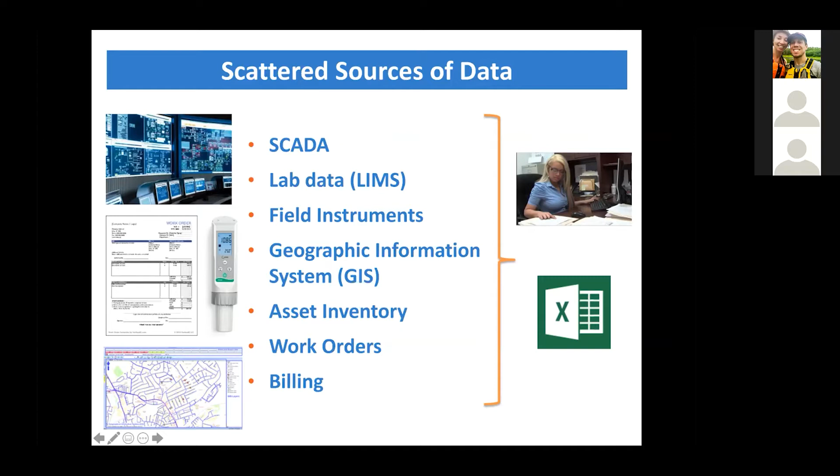So as I mentioned, heavy on the paper use, and also using Excel, which is great, but there are version control issues. That causes a problem with making sure you're up to date with which Excel version you're looking at. There's increasing regulatory pressure, as I mentioned.

You know, it takes a lot of time to gather all that information that's been collected on paper or on Excel out in the field, and that supervisor has to spend a lot of time to organize and review all that before he or she puts it into any type of DMR or a monthly operating report that goes to the state.

And of course, with that comes a lot of human error. It's not intentional, but someone's writing something down, it's hard to read it. There's going to be an error somewhere along the way. And then there's more pressure as well with developing asset and maintenance plans. I've seen some states are starting to put together guidelines to get them to start pushing to put together these asset management plans. And in some cases, they've taken it further where they actually have specific reports they require.

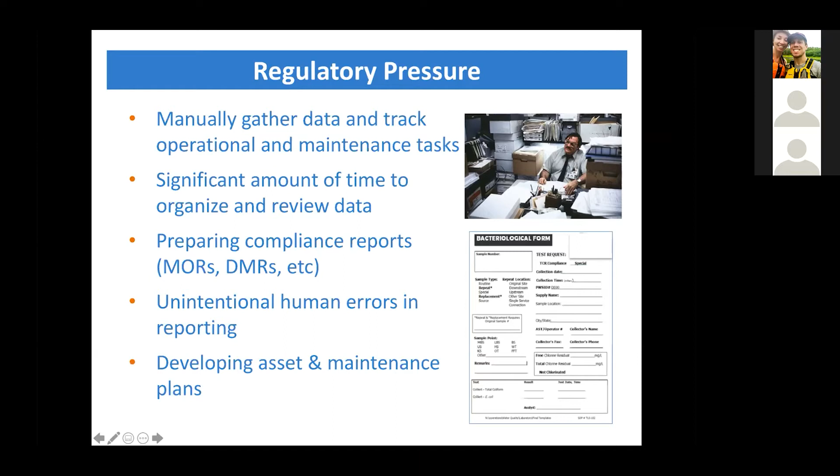So a little background on the FLOWatch platform. After we collected all this kind of information of what's going on with operational processes, we decided to build a platform that was very focused on the plant operator. Essentially, our strategy was to build a system that was very configurable or quickly configurable for any type of plant from the ground up.

Our whole team feels as though the key to software adoption, especially in our industry, is to make sure it's very user-friendly. Because if a plant operator or user of the system doesn't like it or doesn't want to use it or isn't putting in the proper data, the output reports for management are pretty much useless. So we wanted to build a system that was, like I said, easy to use, but also scalable. We want it to be so that you could easily configure it to the uniqueness of a plant.

Within FLOWatch, we built it so that it was easy to add in any new regulatory parameters that you want to track. There are some plants out there that need upgrades, and as they do the upgrades, they change what they're tracking at certain locations. So we wanted our system to be very moldable to the plant at any point in time.

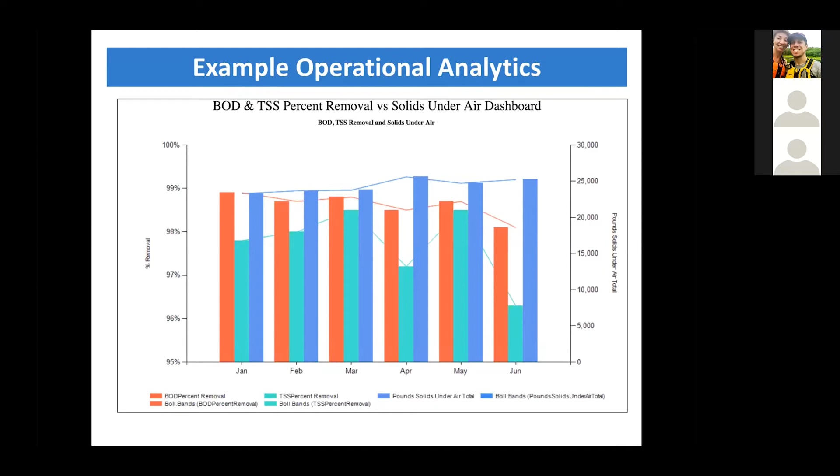So just to recap on everything I've been talking about, in terms of technical benefits, we created a system that is going to allow the users to have access to information right away. Everything is near real time because it's based on data coming in. If you're getting SCADA data streaming in, you may have 15-minute intervals or whatever the client's interested in. As they log in, they can see all the information coming in from SCADA, from the log sheets, and their mobile apps. And from there, they can just run their reports with a click of a button.

Also, the way we designed FLOWatch, it's supposed to be easily configurable. So you're looking at a much shorter go-live timeline. We have a specific process in place for the implementation phases when we bring on a new client, and we can do things in just a matter of a few months, depending on the size of the project, what they want, what the requirements are. Essentially, you set up the plant, you set up the parameters they're tracking, you work on the SCADA integration piece, you do some training. It's a very fluid back and forth between us and the client.

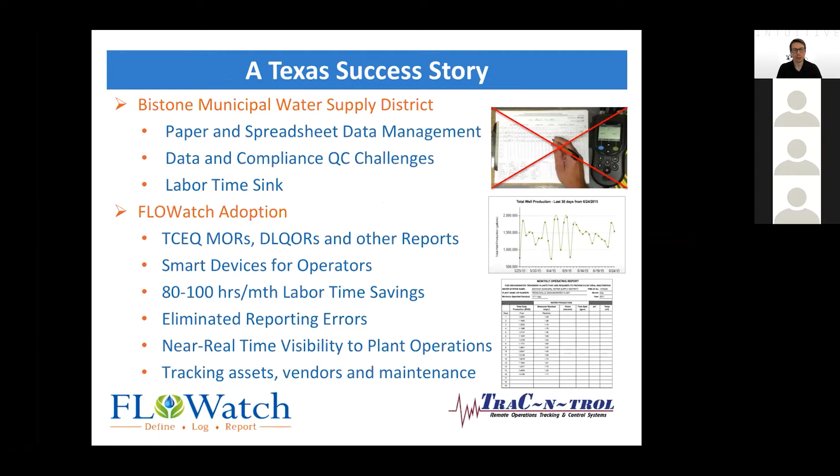Yes. We actually created the platform to also export for simulation and modeling and whatnot. So it can go both directions. Right. So you do have an API where somebody can read data. Yes, that is correct. Cool. Perfect. I think that answers exactly what they were hoping.

I've got another question here. It says, as I understand it, you can pull data from various sources that include public domains. So that would be, I think, like weather data from USGS or Environment Canada, or different bits of data from public sources. Yes, we can, as long as they have an API or some sort of access. Sure, understood. Yeah, in fact, in a lot of cases we did that with other data.

I was going to say, I think the USGS and a bunch of the data that you get from the US government is available for anyone, and I think they actually provide it in JSON and XML, I believe. But in a lot of other sources, you need an API key or something as well. So if the customer had that, you're saying they should be able to query those?

Yeah, in fact, we did that with some agency on the energy side. It was an energy project that we were working on, and we pulled it from a website, and they had all the instructions of how we would have to pull the information, and that worked. And they gave us near real-time information. It was all energy driven, and then we also have done it for weather.

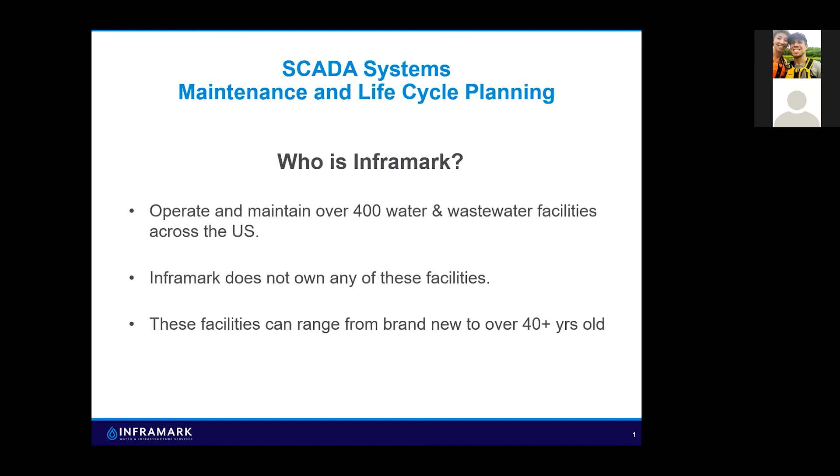So anyway, the goals for this breakout session is to develop a list, and this is where I want your audience participation, okay, which is a list of PM tasks for control systems. Oftentimes we go to plants, we see control systems, SCADA systems, and since it was installed, nobody's touched it. Nobody's even looked at it. The only time somebody does something to it is when it fails. Lightning strike hits it, something like that.

So what I want to do is develop a list of PM tasks that we can send out to all the attendees today. And you can use them in your facilities, or if you're an engineer, integrator, you can use them as part of your O&M manuals, or however you want to use them. And then the next part of it is to talk about hardware life cycles and how to plan and proactively address obsolescence, okay?

SCADA systems have been around for quite a few years. The first one I've worked on was back in 1982. And it was run on a DEC PDP-11/44 mini mainframe computer at a wastewater plant. They've changed a lot since then. We went into legacy systems like Bristol Babcock, Healy Ruff, etc. Turbotrol, that was that system I first started with. And then they've kind of moved more towards the desktops. So a lot of different systems out there now, and we still need to plan for obsolescence, end of life cycle.

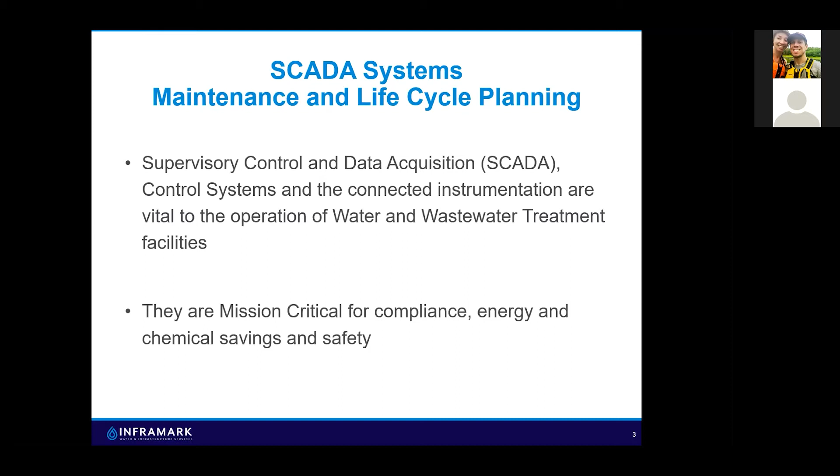But a month after the system was up and running well, if you turned it off, they were screaming at you. So we've gone from, okay, this is a new kid on the block, to something that we can't live without in a lot of plants. It's mission critical, keeps us in compliance, saves us energy, chemical savings, and it also has safety aspects to it too. So that being the SCADA systems today, then why do we seem to neglect them?

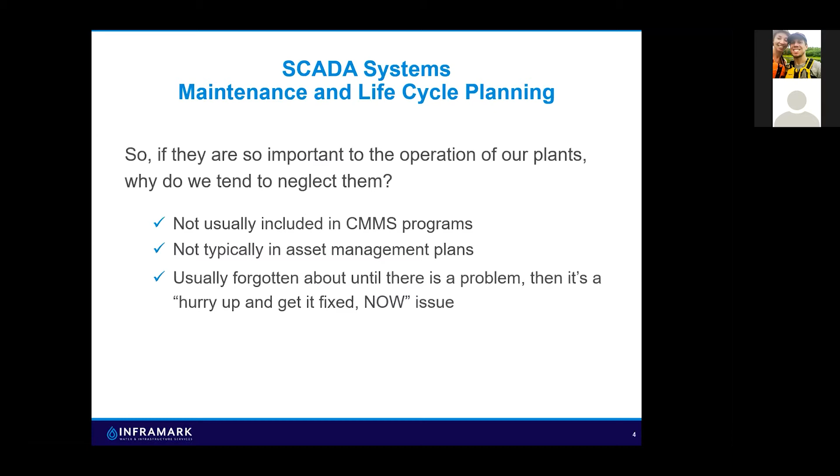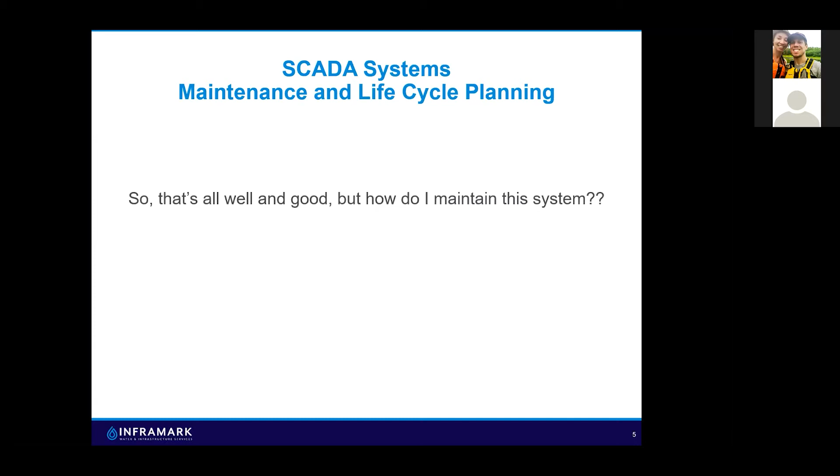They're not usually in a CMMS program. They're not typically in asset management plans. And like I said earlier, until it's broken, and then it's a hurry up, get it fixed now issue, they're not really addressed. So the next question is, okay, how do we maintain those systems? Or what do we tell our clients to do to maintain their systems?

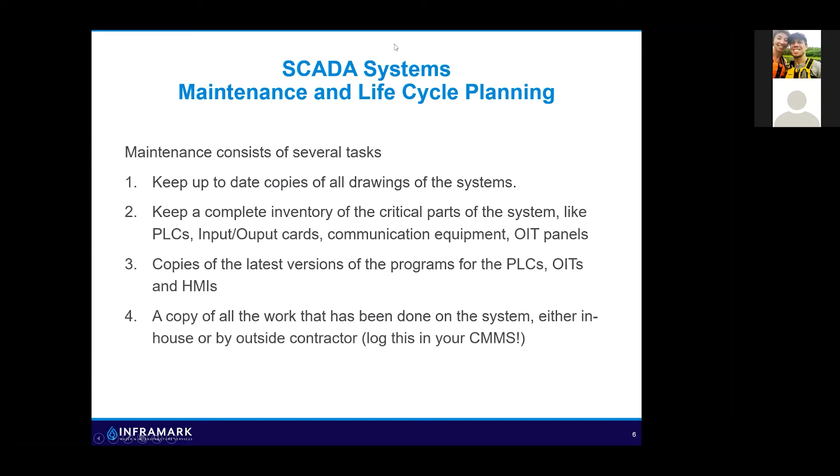So we've got several tasks here, and I'm actually going to switch the screen and go to a spreadsheet, which I've started. Okay, I've seeded it a little bit, and this is where I want some audience participation, because I want to see what you guys think. What should we put in here for PMs? So if you can fire away in the Q&A box, that would be great. I'd love to see some stuff coming in from you guys. I've got some other things I can seed this with, but please send it. Okay.

All right, just got the first one come in there. So it's critical alarm testing. Okay, great. And thank you for your correction, Mohammed. I just almost read it as you initially wrote it, which would have been more embarrassing for me. So, Mohammed puts in eyewash. Right. Okay. Actually, critical alarm testing for anything. I'm going to leave it open for components, because I think it needs to be all.

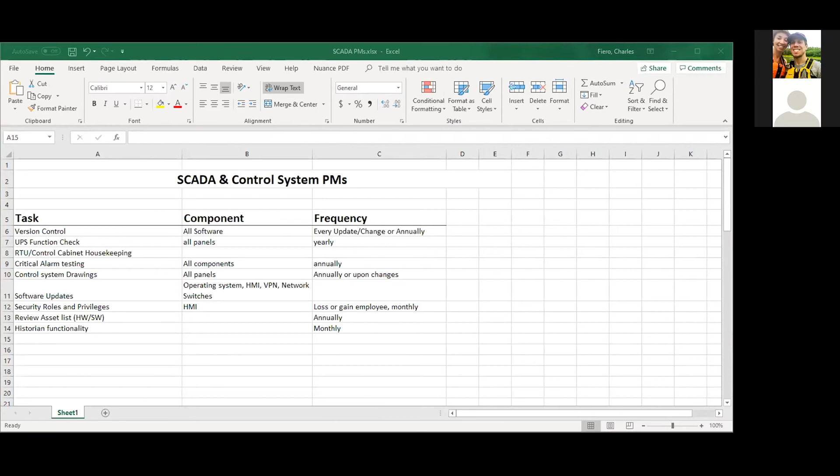Okay. Come on, we got to have some more here. Historian functionality. And it's suggested monthly. Okay. Trying to figure out how I can move things around with the screen. Yeah, take your time there. Yeah. So I've got a few other suggestions. System health check. How about call that diagnostics? And PLC.

Okay. How often do you think we should do a diagnostic check? Do that quarterly, semi-annually, annually? Okay. All right. Yeah, you go for it there, Charles. I'm just looking at the bottom of the list here. So it looks like quarterly just came in. Right. I think that's probably a little bit better. Again, dependent upon the size of the system, that's a good question. Let's see, quarterly.

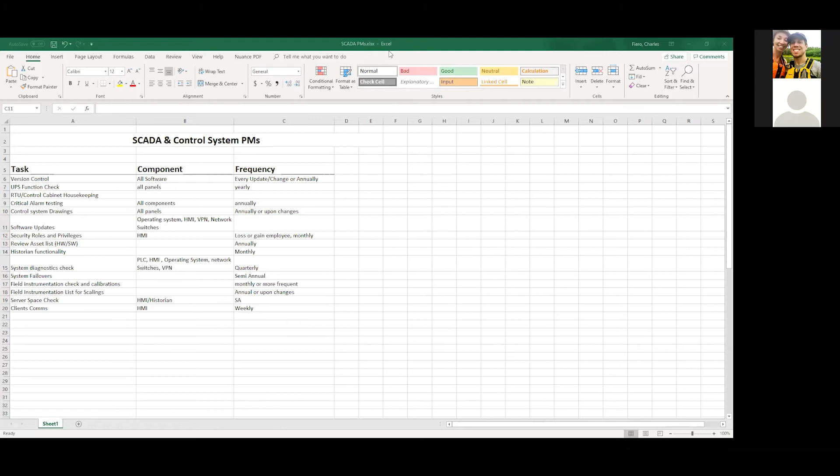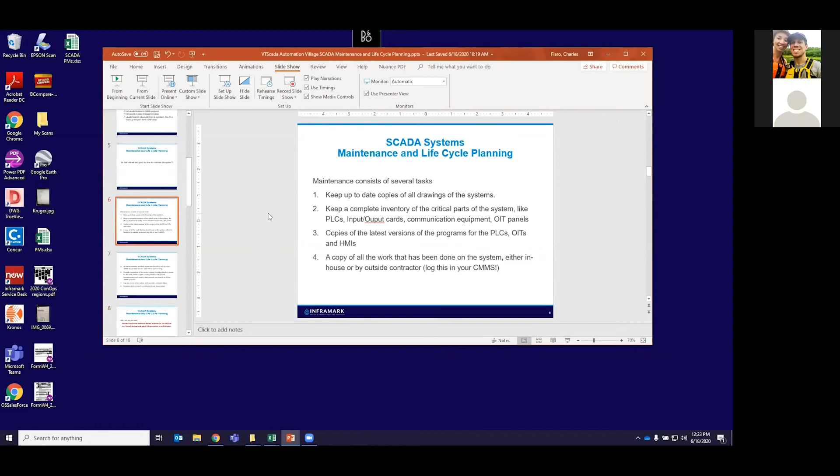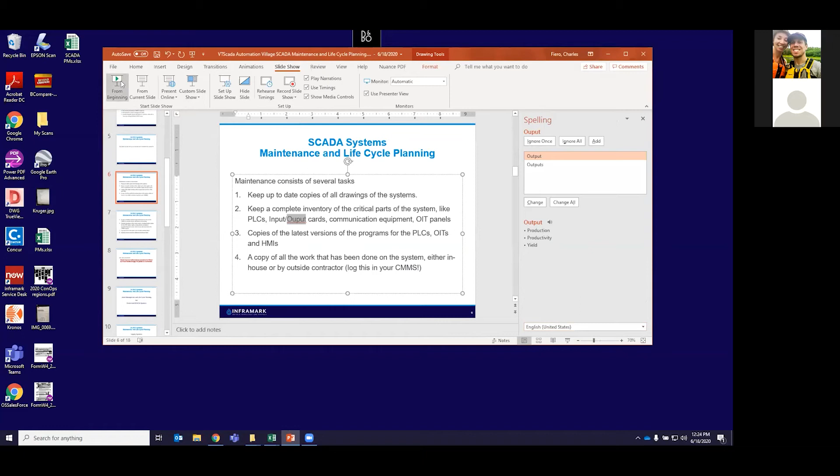Tell you what, okay. Let me throw out some of the ones I've got in here for this that you can, that's not, yeah, there we go. Okay, so I think we've caught a little bit. Obviously, to do a PM program, you're going to need a complete inventory. You want copies of your latest programs, and latest versions of the programs. We talked about version control.

Log into the CMMS all the work that's been done on the system in-house or by an outside contractor. If somebody comes in and replaces an IO card, let's keep track of that. If you keep replacing the same IO card, there may be a deeper problem than just the IO card.

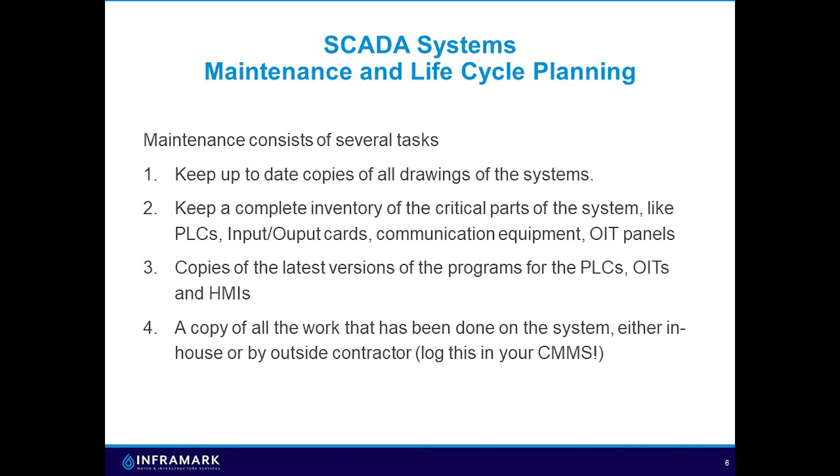Obviously, instrumentation, field equipment. I've got one that I called housekeeping, which includes function checks for the UPS systems, your heaters, your lights, any cooling devices. How many times have you gone into an old control cabinet and you open it up and there's a wasp nest in there? Yes, let's keep the housekeeping down on those. Log the errors that come up in the system and any corrective actions that have been taken.

Nuisance alarms, a pet peeve of mine, mainly because to me a nuisance alarm is one that probably doesn't need to happen anymore. It's alarming a piece of equipment that may not even be there anymore, or there's a failure in the system but nobody's addressed it. So OSHA is actually supposedly coming up with regulations on that particular aspect because it's a safety issue. If you got a lot of nuisance alarms in your systems, your operators become numb to the alarm and tend to ignore it.

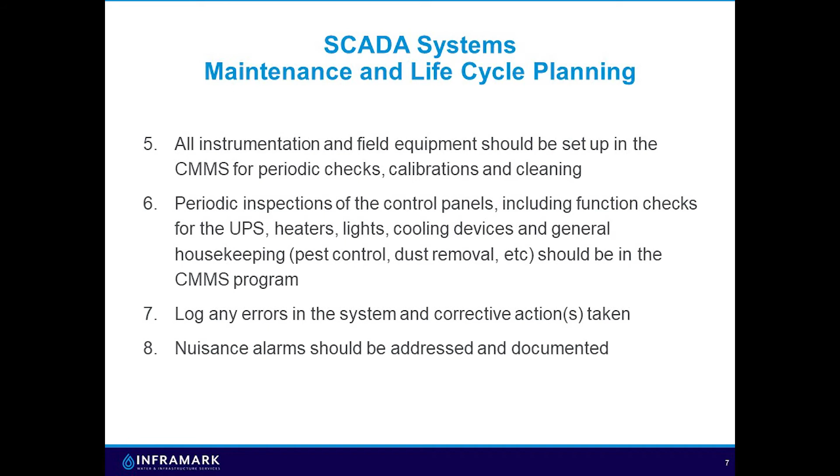Here's one I know that Dave would be glad to talk to. Maintain the annual software license renewals for the HMI firewall devices. Okay. I've gone into a lot of different plants and, okay, they've got an HMI that was put in 10 years ago, hasn't been updated since it was put in. It's running on Windows XP. How secure is that? Not to mention, you look at other things, and your VPN, the switch is outdated, obsolete, and you can't get updates for it. Again, a big security issue. So,

Okay, I think we got all the others in there. I will fill in what I've got in the spreadsheet here, or in the PowerPoint with the spreadsheet, and I'll be glad to send it out to everybody that was in the session today. And feel free to use it. It's not proprietary. It's not copyrighted. It's yours to use and abuse. So, okay.

So let's jump over to asset management, lifecycle planning for control and SCADA systems. And some of you may know much of this already, but I talked earlier about some of the legacy systems. Up until 2010, I was actually working with a plant that had a large portion of Bailey still running in the plant. The plant was upgraded and all that was replaced, but where are you going to get parts for any of these systems at this point in time? It's going to be hard to find that.

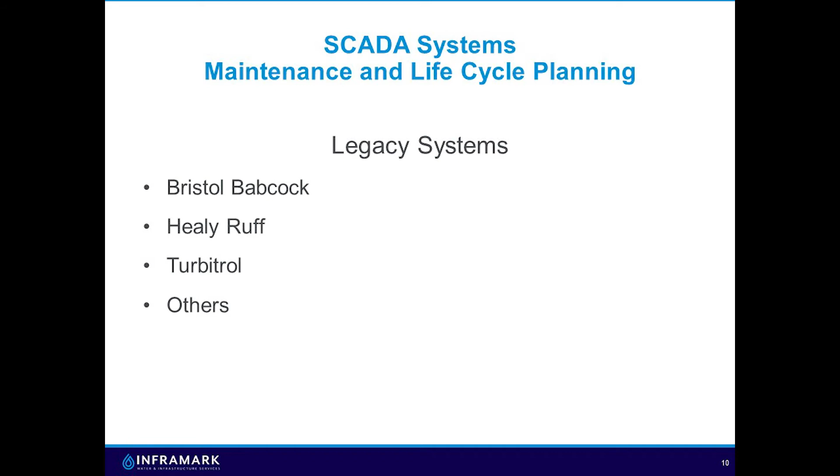PLC's life cycle is around 10 to 15 years. And we define these as 4 parts of the life cycle of the PLC. You've got the development phase. The manufacturer is developing a new PLC. He's got a new CPU, new components, etc. He's doing development. During that time, he's not selling these units, okay?

He's just developing them. Then once it's finalized, ready for sale, it goes into the active sales phase. And that's when, if you're an integrator, all the sales reps are coming to your office saying, I need to show you this new PLC we just developed, etc. Okay.

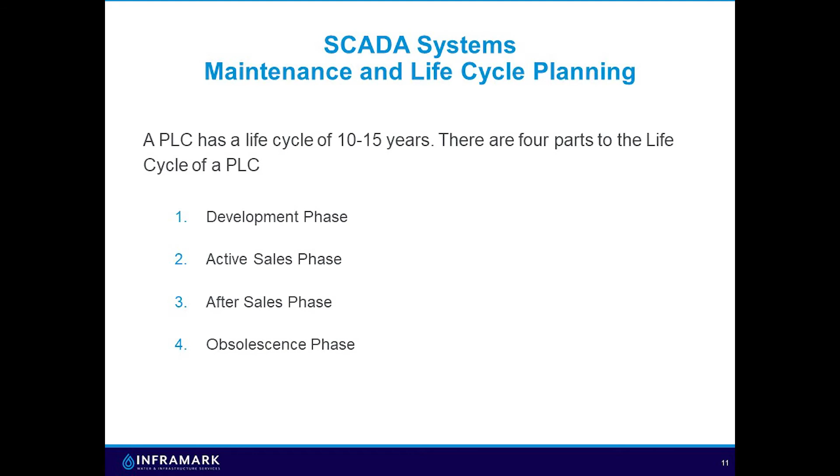Active sales phase is when they're out selling it. During this time, there's still some development and upgrades going on to the product line. Okay. The after sales phase, they're still producing the product line, but there's usually not a lot of active development going on with the product line. They may have some minor updates, security updates, things like that, bug fixes, but for the most part, they're not really developing a whole lot of new stuff to that product PLC.

And then at some point in time, you're going to hit an obsolescence phase, okay? And that's when they're not selling it or producing it anymore. So that's critical because at that point in time, you're not going to have access to purchasing these things from the manufacturer or their sales rep organizations. You're going to have to go to some third party. So a third party is somebody that's gone out there and said, okay, I know that 3 months from now, this PLC manufacturer is not going to make their smart PLCs anymore. So I'm going to buy up all the stock they've got and sell it after they stop making it.

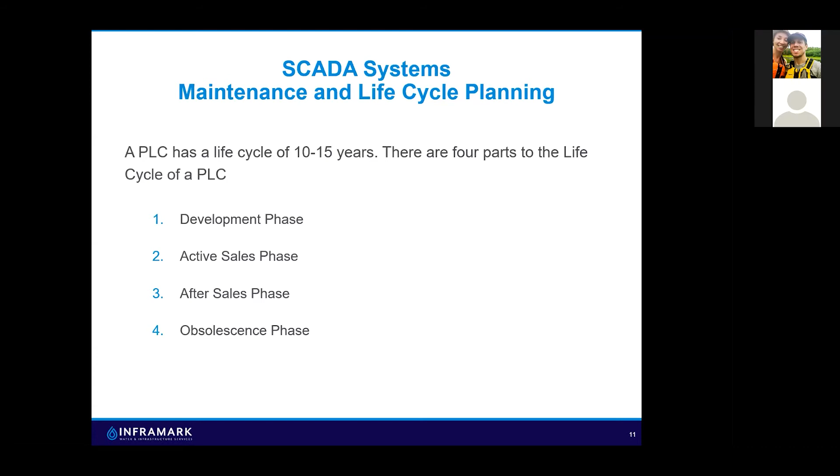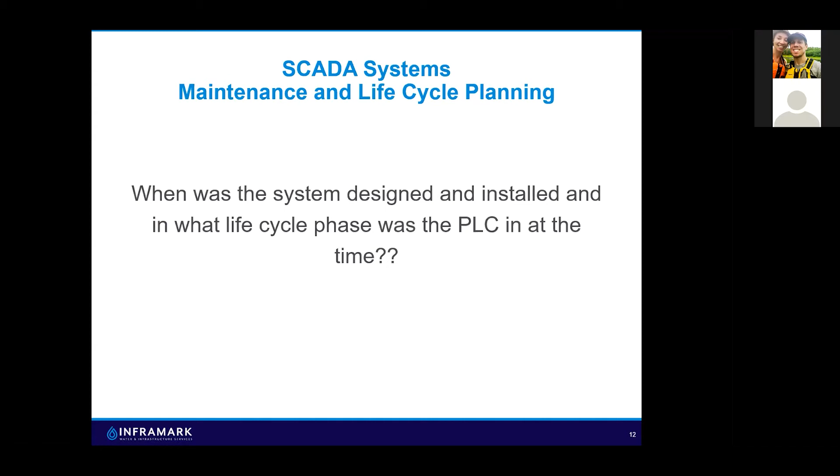So anyway, then the question comes for your system, when was it designed and installed, and where in the life cycle process was the PLC at that time? Most times you're well in the active sales phase for these designs, but that may not be completely true for all systems. So again, your system might be obsolete if the manufacturer's out of business, the model's no longer made or supported, you have to use Windows XP to reprogram it, or you require a serial port to program. When was the last time anybody bought a laptop with a serial port on it? Getting hard to do it.

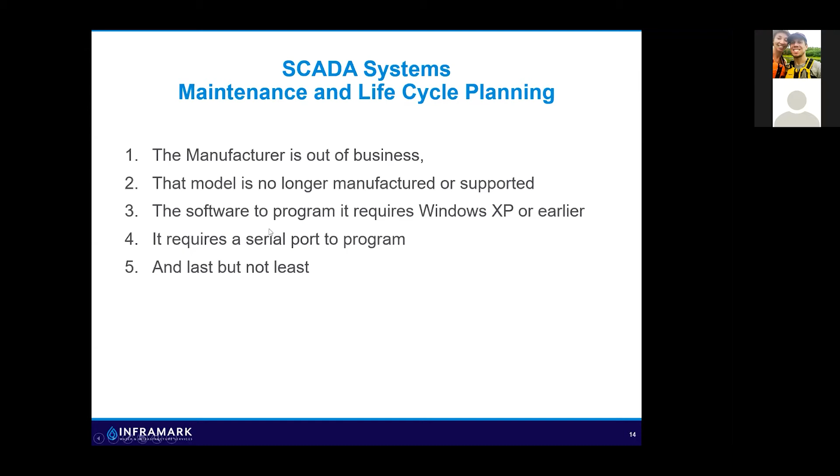We work with an integrator, and he's got a couple legacy laptops, and one of them is such that you actually have to hold your finger down on the laptop case in a certain space to get it to boot up. But they're afraid to get rid of it because it runs programs they can't run on anything else. Last but not least, if you have to buy your parts off eBay, your system may be obsolete.

So HMIs can also fall into the same category, okay? They're running on Windows XP. They haven't been updated in several years. Like I said, we were at a system running an HMI that was installed in 2010, and that was version 1.0, and the current vendor's up to version 12.

Also, remote login software to access the system can be a cybersecurity issue. I much prefer using clients to access the system rather than LogMeIn or some of the other sources where they actually take control of the computer. We had a plant where they used one of these remote login softwares, and you could go and see how many attempts were made, and it was constant all day long, somebody pinging that IP address trying to get in. Fortunately they didn't get in, but that's not something you want to be doing.

So the question is, as an integrator, or if you're actually working in the plant running these systems, or an engineering firm, and your client's got a system that's 10 plus years old, has obsolete hardware, software, then it's time to have a discussion with either your bosses or the clients about developing a capital plan for replacing the system or updating the system. The America's Water Infrastructure Act and NIST cybersecurity framework and the current cybersecurity issues are an excellent opportunity as a starting point for that discussion. So have that discussion, start that discussion.

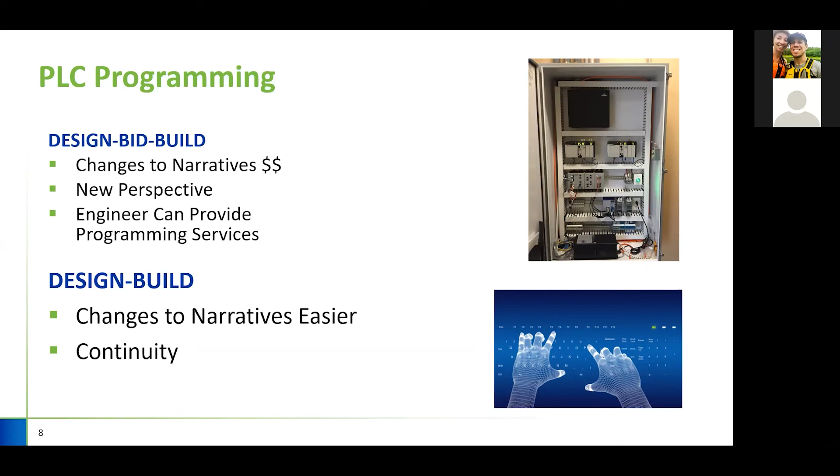Now, looking at design-build, again, the changes to the narratives are much easier because you own the whole thing. You own all the risk. So those control narratives for the PLC programming, you own all of that. The nice thing about design-build is continuity, and you'll see this word come up again and again when it comes to design-build. When I'm working on a design-build project, I know the client from start to finish, and so you develop relationships, and it's actually a great experience. It has been for me, meeting all the different people, operations staff, and just walking through the entire project with them. So that is a positive, the continuity on the design-build side.

So there were no major network pieces that I had to deal with. However, over time, I had to start to become this network guru, and at the time, I didn't necessarily like that. Now it's totally changed. I'm into cybersecurity, and I'm Security Plus certified, and so this has become of great interest to me.

But these pieces of the puzzle are the most important pieces of the puzzle, because if this system doesn't work, your system isn't going to work. It's that simple. Your communication system around your SCADA system has to work, and not just work, but work really well. You really have to be able to rely on it. And so I just say it's getting very complicated. There's many different approaches to this.

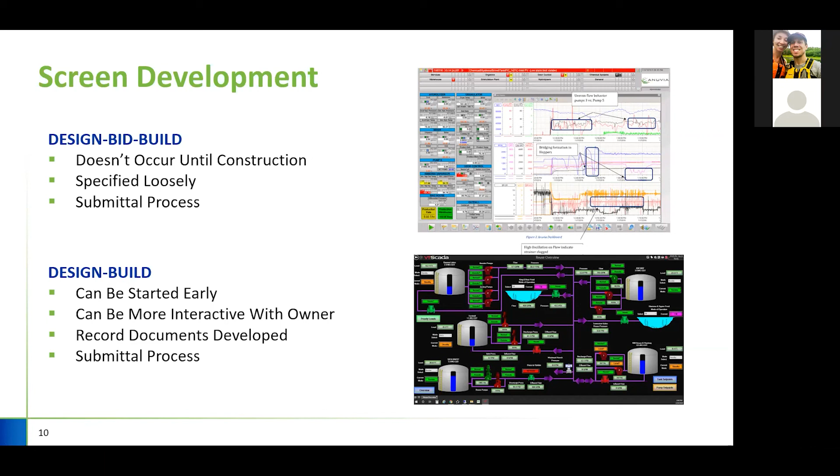You can kind of mix the two together and get what you need out of a project. What I like to look at with both of these methods is I like to make sure we partner with system integrators all the time. I oversee the automation group for CDM Smith, and I'm a big fan of teaming arrangements. As you can imagine, there's multiple personalities on a construction site. Been there, done that. And if you can develop a teaming approach on both the design bid build and the design build side, you're halfway to the win.

So in the design bid build, the general contractor teams with the integrator, and then they formulate their other team. So the automation and electrical projects, those are the smaller ones. Like I said before, we like the integrator to actually lead those projects instead of an electrical contractor, especially if it's mostly automation or SCADA related. Typically, I&C are provided by a single integrator. So you have an integrator. They provide all of the I&C work that's on P&IDs and specified throughout the specifications.

They provide some instruments, but they rarely provide all the instruments. And so here you have a little bit of a problem that can creep up where the design has to be very clear and there has to be clear separation between vendor systems and who's providing what. Because typically, I remember, this is back when there were fax machines, starting to reveal my age, but these guys would fax sheets of specs and drawings to us, and we'd have to cost out a project with faxed documentation of whatever he selected. And so sometimes it's not very clear. Now today, obviously, it's totally different where we have access to PDF drawings. But even in the design set, which is what I'm focused on, you have to be very clear about what you're talking about.

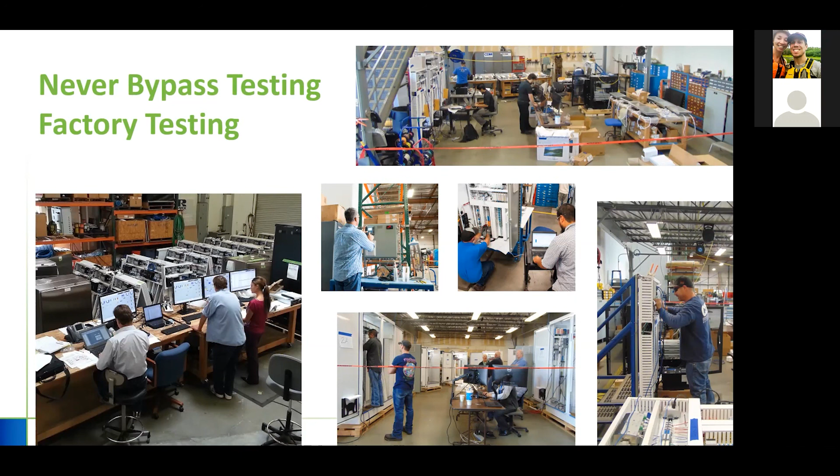Here's just a couple real quick ones. Lessons learned from me to you. Never bypass testing in the factory. Factory testing, I've seen it. We've done it. It's never turned out well. Schedule. Why don't we just bypass the testing? We'll make sure it works in the field. Sure you will. It never works, and it costs you time in the field. Always do testing in the factory. Look at it, touch it, feel it, make sure it works before you go to the field. Never bypass that testing.

And one last one is last minute major changes. Never, ever do major changes at the last minute unless you want to spend some money and do it right. I have had horrendous experiences trying to marry up two different controller manufacturers after we had completed a design and it went out to bid and it was awarded. This was a design bid build. And then they wanted to make a major change to the controller and it did not work out well for anybody. So these are just major things that you want to avoid at all costs.